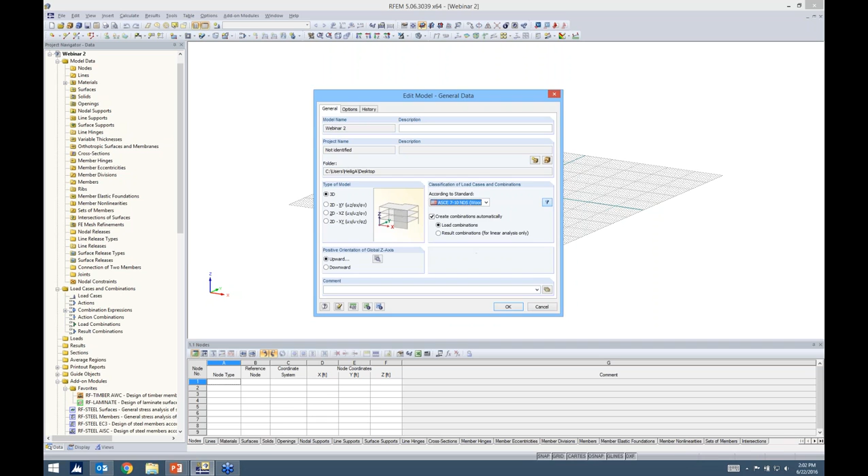When you launch RFEM, this is the dialog box you'll receive. You simply need to give your model a name and define the type of model, 3D, with the orientation of the z-axis upward. For our load combinations, we have ASCE 7 for 2010, the NDS wood load combinations. I check the checkbox to create these automatically, then we simply click OK.

Some of you are familiar with RFEM, but for those who aren't, this is essentially the program. We have the tables for data input as well as our results down here at the bottom. We have our project navigator over here on the left, which can also be used for data input.

We have our display tab down here, which basically controls everything in our view window. We have views, which we'll be using today, and once we run our results, we should get another tab that says results. And of course we have all of our toolbars at the top for our modeling purposes as well.

So we want to begin today with our walls, and typically with walls we'd want to model them in this vertical direction. What I find easiest is to use line elements to begin with. Up here we just go ahead and choose new line in the toolbar, and you'll hear me say this quite often - we have a lot of AutoCAD-like features, which I think is one of the more powerful capabilities in RFEM.

Not a lot of time will be spent trying to create very complex geometries because we have all these capabilities within the program itself, such as splines, polylines, arcs. So you can see for line options, we don't have the typical straight line, but we can choose any one of these. For our application, we'll just go ahead with a single straight line.

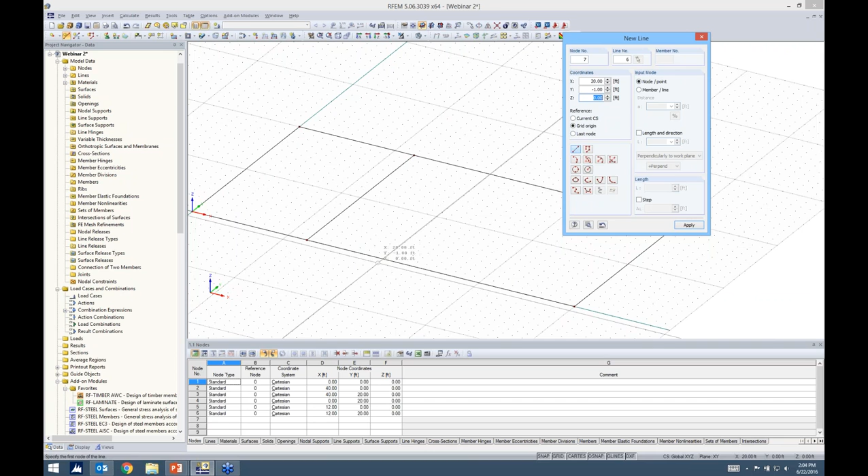Now all I'm doing is using my drawing grid to draw a 40 by 20 outline of my building here. You'll notice I just snapped to the different points, and I'm going to add an intermediate wall, maybe right here at 12, and one more at 20. So we have nothing more than just these 1D line elements here.

What I can do is select them, right click, and under line I can go ahead and extrude the line into the surface. Something to note here, these are going to be cross-laminated timber panels. So cross-laminated timber is not available in RFEM.

In order to define all of those different layers and properties, we have to use our RF-LAMINATE module, which we'll be spending some time in a little bit later today. So it's worth noting that the material here for our panels doesn't matter. We can just go ahead and choose something very general, such as concrete or steel, because all of this is going to be overwritten later by the add-on module RF-LAMINATE. So for now, concrete is fine.

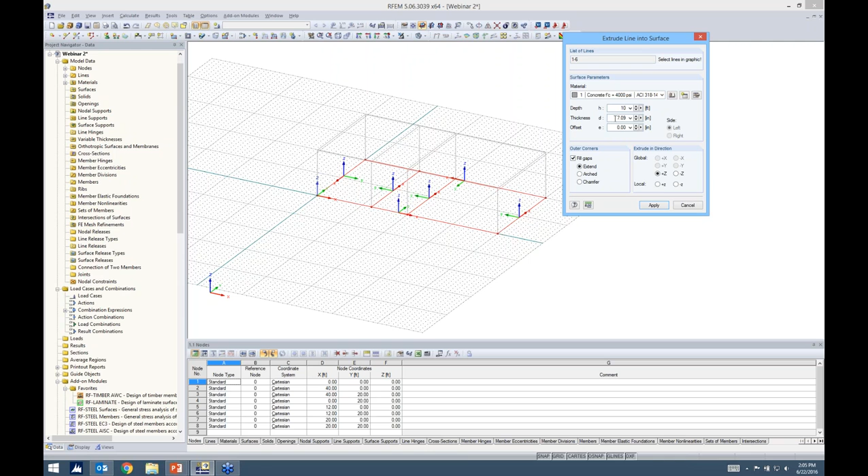I want a height of 10 feet. The thickness doesn't matter either, that will be overwritten as well. So I hit apply, and now we can see that our walls are quickly generated.

Maybe we want to add some openings in these walls, and for this I'm going to go ahead and change my work plane. You'll notice that work plane is just on this front wall of the structure. Work planes are important because when we continue modeling, the work plane confines exactly where you're drawing your elements, so I don't have to worry about drawing clear out in space or accidentally drawing on the back wall. I'll be drawing where this work plane is set.

As far as openings, our other toolbar up here has all the different opening options. We have the typical rectangular opening, but also many other options. This can be super powerful when you're doing finite element modeling, or maybe you have a structure with odd geometry for different openings in a slab or wall. You can see ellipses, polygons, anything you can think of.

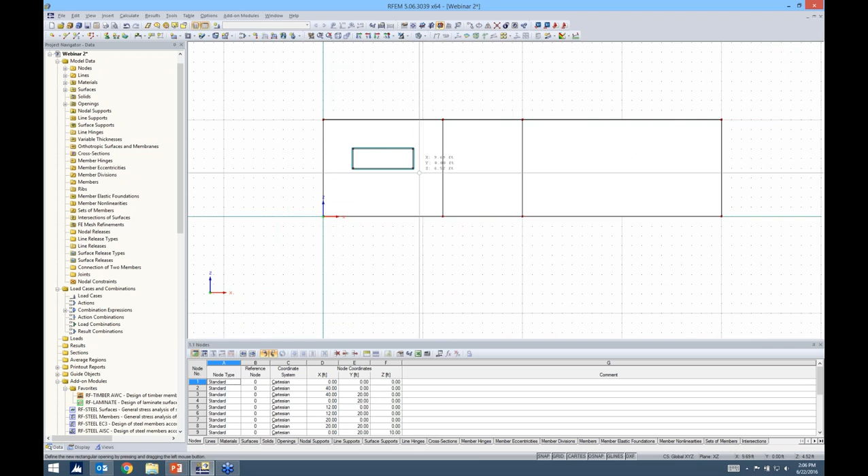For us, we'll stick with a rectangular opening, and I'm just going to draw some windows here, nothing too complex. Maybe we want a door opening here, and lastly a window over here.

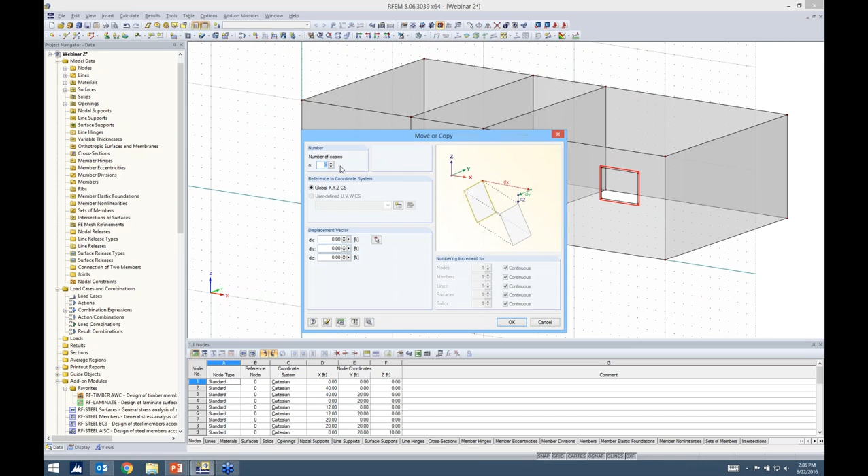Now, as far as the windows for the back wall, I can hold down my control key to select these openings. I'll use my move tool and create one copy, moving it back 20 feet in the Y direction. You'll notice I'm going through modeling maybe a little quick. We have plenty of other webinars with more basic modeling, but I really want to get to the CLT and timber design, so that's why it may seem quick in terms of all the modeling behavior.

Now that we have this defined, I'll change my line grid for my floors. I simply change the work plane again, and you'll see how quickly I can define my different origins, and now I'm at the top of the structure.

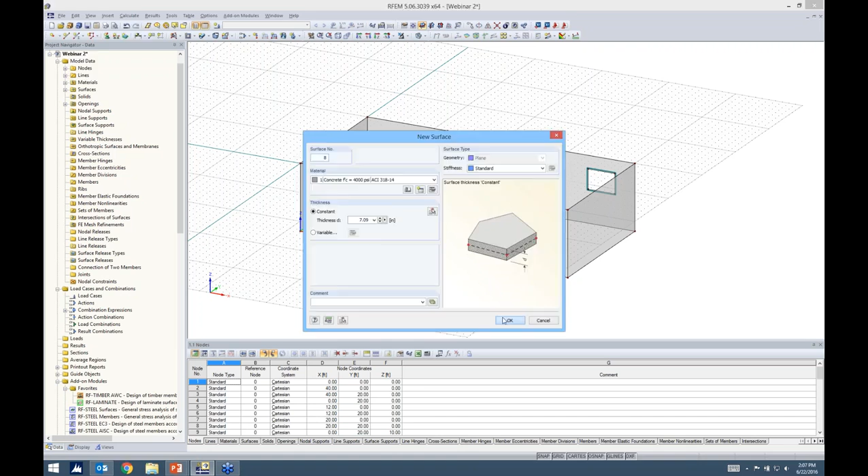We have this other button up here, and this lets me select all of the model. Instead of a single continuous line that previously existed up here, these are now broken up where the wall panels intersect. Now I can create a surface by selecting my boundary lines. Again, the material doesn't matter and the thickness doesn't matter—this is CLT that we'll override at a later point. So all I need to do for my floor elements is select my boundary lines, and then do so for the second diaphragm. And we have our first floor.

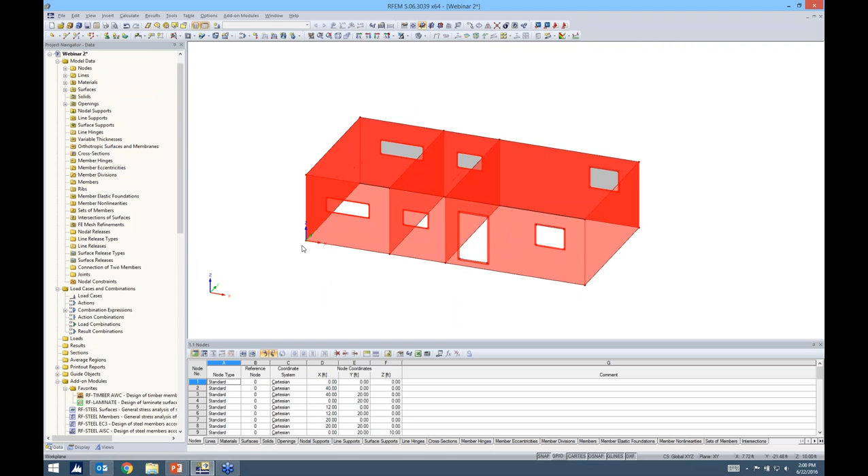Now we want to create our second floor. That's just as simple as selecting our walls—I was careful not to select the floor panels—holding down my control key, and dragging and dropping. Dragging and dropping is a very useful feature in the program to really save time on modeling.

Maybe I don't want this opening up here at the top. I can just select it and delete it.

Now we want to create a pitch in the roof. For this, I'll turn my rendering off to only a wireframe model. This way I can select all of these lines at the roof level, right click, and divide the line by n intermediate nodes, placing one intermediate node at all of these lines.

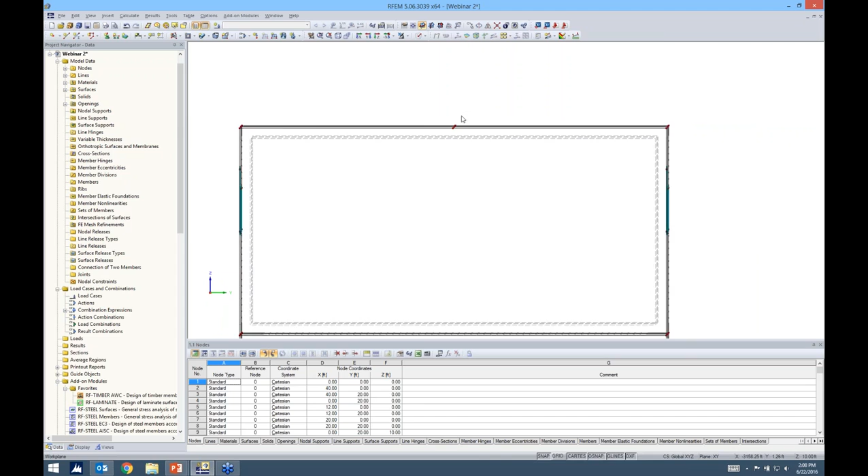Pretty simple. Now I want to highlight only these nodes and use our move and copy tool. This time, instead of creating a copy, I'm going to move these particular nodes in the positive Z direction 3 feet. So now you'll see that we have a pitch in the roof.

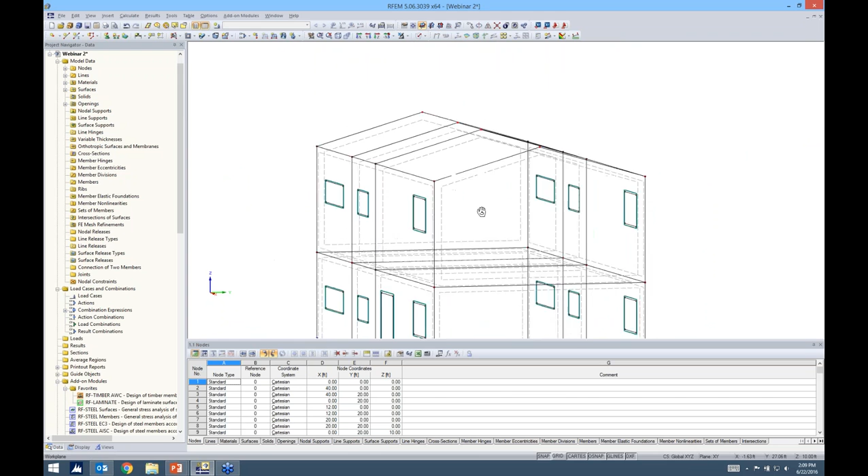Fairly straightforward. So now we want to draw our timber members. We click on New Single Member, and you'll see the member type is considered a beam. There are several other options here, but for this application we just want a typical beam member. We want to create a new cross-section, and up pops our cross-section library. For this, I want to choose standardized timber.

Then this dialog box will pop up for all of the different standardized timber sections. We can further filter according to AWC. We also have CSA in here, depending on which type you're exactly looking for.

You can also go ahead and choose a favorites group. I created this favorites group, USA, and basically I just added in a couple shapes that I'm using for today's webinar. Rather than sifting through all of those different shapes, you can create as many favorite groups as you like and add or delete any of these shapes here.

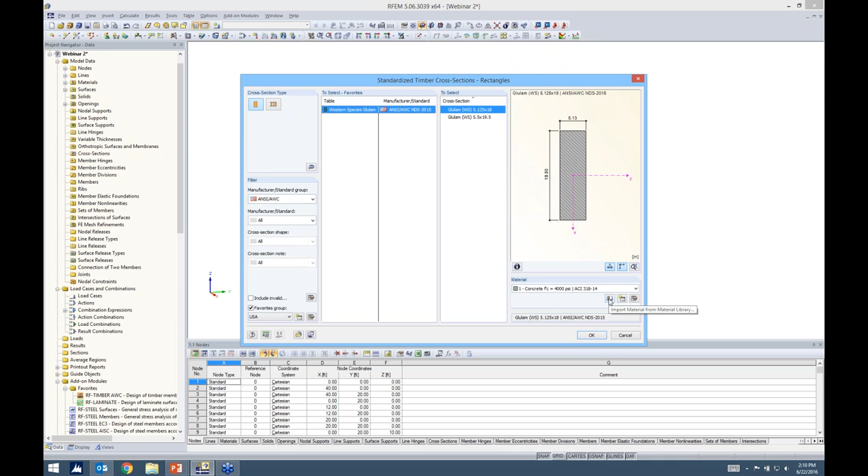Concrete won't suffice for this timber member, so we need to go ahead and define our timber material. For this, I go into my material catalog. Of course, we want the timber filter initially, and then you'll notice that we have all of these further filters.

For our application today, we want to be in North America because North America contains the AWC materials and the CSA materials. Even for AWC, it's quite an extensive list. You do have the option to search here, but again, I added it to my favorites group.

So for this particular member, I'll use a 24F-1.7E for my material. All of the material properties are shown right here, so very easy to access. Now it looks like we have something more like a timber material. I can click on this info about cross-section and get all my cross-sectional properties just at the click of a button.

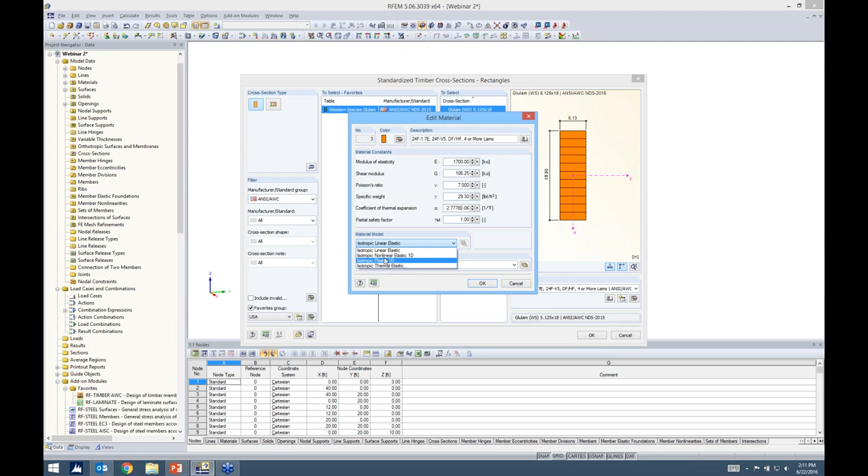Now, one thing to note here: if I go ahead and click on edit material again and look at my particular material model, this list isn't really as extensive, because I only have a 1D element chosen right here. But I'm going to jump back to the PowerPoint.

All material models are listed here available in RFEM. Technically, timber is considered viscoelastic, meaning that the strain rate is dependent on time. But realistically, we can't model viscoelastic in software, it's just very complex, so we will just go ahead and consider it elastic.

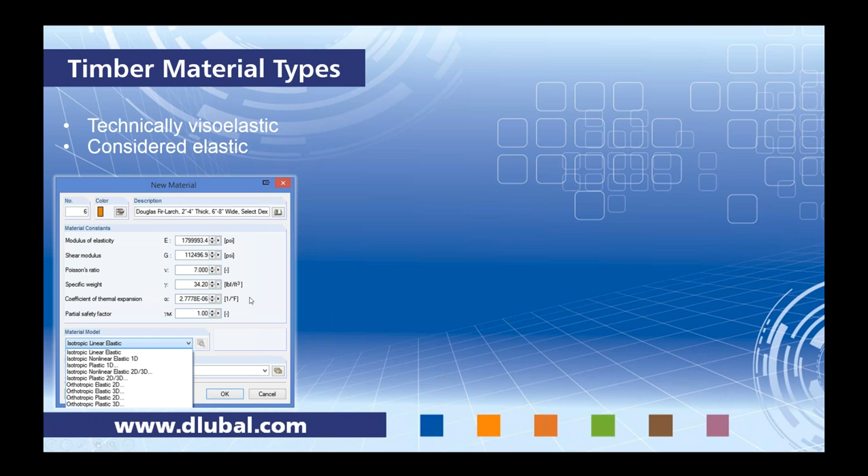This is the basic behavior of modeling timber. However, I want to differentiate the different material models for our different elements. So for 1D member types, such as we're modeling right now, we'll use isotropic linear elastic. For 2D surface elements, we're using orthotropic elastic 2D.

Most of us know what orthotropic is — it's just where our material properties are different in the X versus the Y direction for each surface element. And lastly, we have the solid model, with that same concept, except now we have 3 directions for a solid.

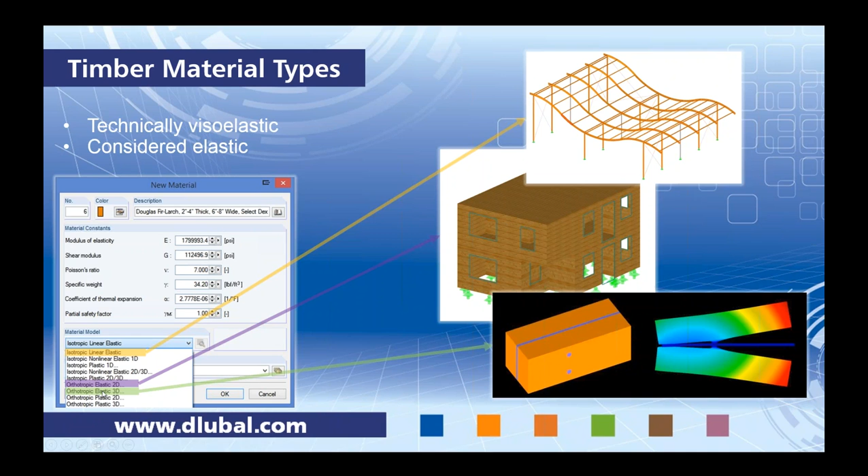Okay, back in RFEM, if I go ahead and click OK, and you've used RFEM before to model timber, you'll notice this error message that pops up every time. This error message is saying you must have incorrectly defined your material.

Poisson's ratio is greater than 0.5. The calculation is possible, but only E and G are applied. Is this okay? I really want to explain what's going on here, because some of us may just click yes and not really know the logic behind why this program's throwing up the error.

So timber is actually anisotropic — the properties are changing with the direction along the object. This is pretty apparent for timber. However, in the program, for 1D members, we only have the option for isotropic, and isotropic materials use this equation to calculate the Poisson's ratio.

It's modulus of elasticity over 2 times the shear modulus, minus 1. So all the program knows is to take E and G, relate it to this equation, and go ahead and calculate Poisson's ratio. Well, 7.0 is extremely high, so that's why the program's flagging it.

And it tells us only E and G will be applied. Is this okay? And the answer is yes, this is fine. The reason why is because if we look at the stiffness matrix for a 1D member, Poisson's ratio is irrelevant — you won't see Poisson's ratio referred to anywhere within this stiffness matrix. So the fact that only E and G are applied, which obviously is present throughout this matrix, that's fine. Not using Poisson's ratio is not a big deal.

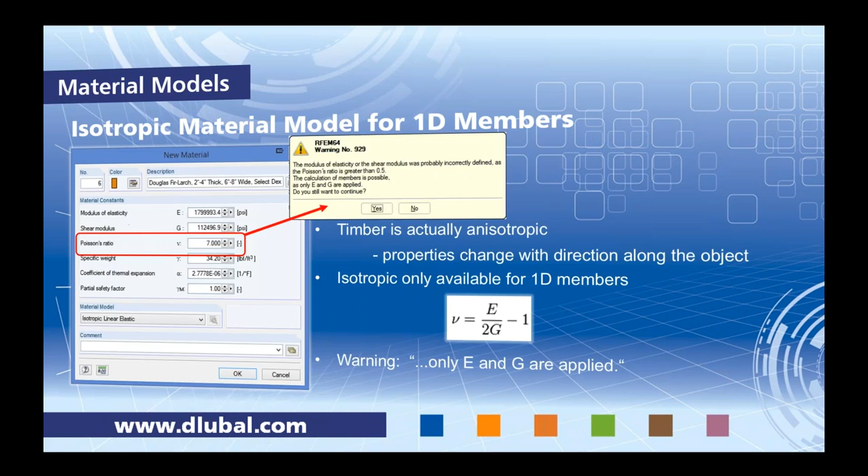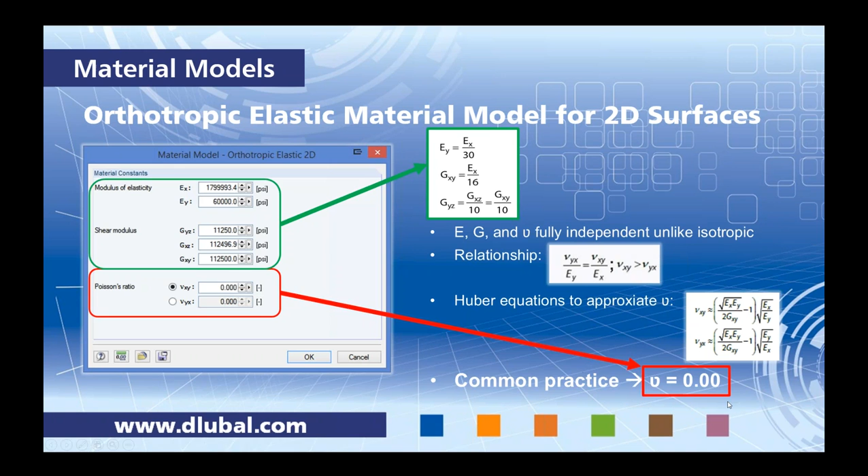Back a couple slides when I showed you this equation E over 2G minus 1, well, this is actually not applicable for orthotropic 2D surfaces. We do have a relationship with Poisson's ratio and the modulus of elasticity, and there are equations to approximate Poisson's ratio, but again, maybe timber cut down on the East Coast and the exact same species on the West Coast will have a different Poisson's ratio. So there's really no way to get that exact number. So therefore, it's common practice just to use Poisson's ratio equal to 0. The program is set up to default to 0, so that's why we use 0.

Okay, so jumping back into RFEM, here's this error. We can go ahead and click yes. So that's kind of where that's coming from, and then I can click OK again.

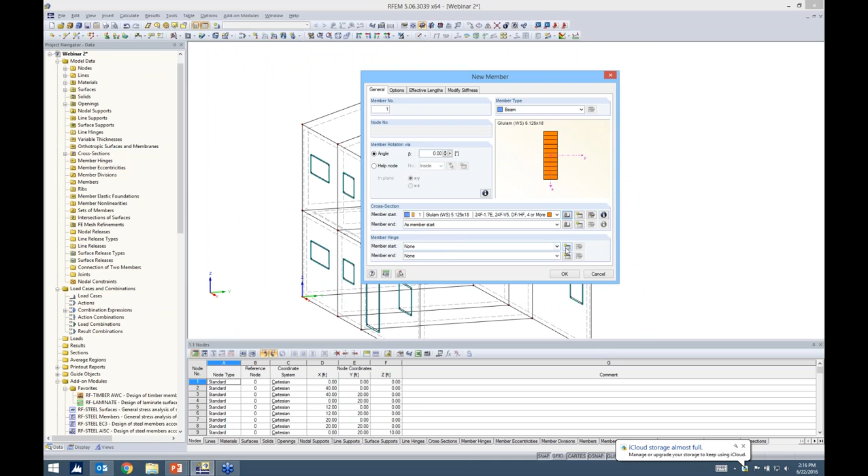Something to also note, we want to go ahead and apply some member hinges to this end. I want to go ahead and create a new member hinge, and the default here is to go ahead and create a pinned release to go ahead and release rotation in the local Y and Z axes. There's a nice picture here if you don't understand exactly how the local axes are laid out. Also, you have the ability to really get into nonlinearities if you choose, such as partial activity. You can define your own diagram, plastic hinges, but you'll notice everything is pretty well hidden if you just want to keep it as a typical pinned or fixed release. So these nonlinearities are possible, but yet it's not overwhelming that you have to sift through all this information just to get your typical release here.

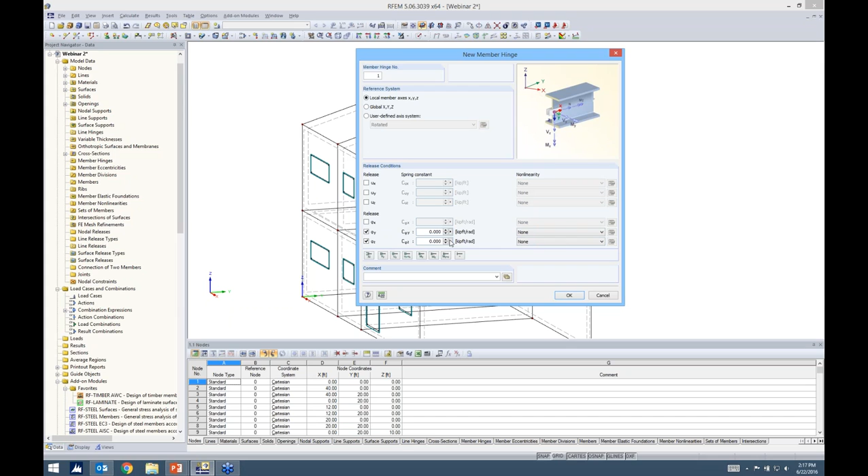So for the member start and member end, I'll use a pinned release. And here I'm just going to go ahead and model this member between each of the walls. And the reason why I'm doing it between each of the walls, I want the pin connection at each wall. I can go ahead and choose the rendered view again, and we can see how that timber member is applied to the roof.

Now, the next thing that we want to do is go ahead and draw in our rafters, and we'll go ahead and create a new member again with a new cross section, this time a parametric timber, and all I need to do is type in 4x8. Now, I don't want this same material. I'll go ahead in my material library. Under my favorites group, I already have Douglas fir larch put in there. I click OK. I click OK again.

Now to address the member hinges. I think where the first rafter joins this larger ridge member, I want a typical pinned release. That's fine. However, for the member end, where we're framing into this CLT wall, I'm going to define a scissor release. And what exactly is a scissor release? Well, scissor release is where we have 4 members framing in together here at this single node. However, the continuous members, such as 1 and 2, will go ahead and transfer moment between each other. Same with 3 and 4, but we don't want to transfer moment to the perpendicular member. We only want to transfer axial and shear forces.

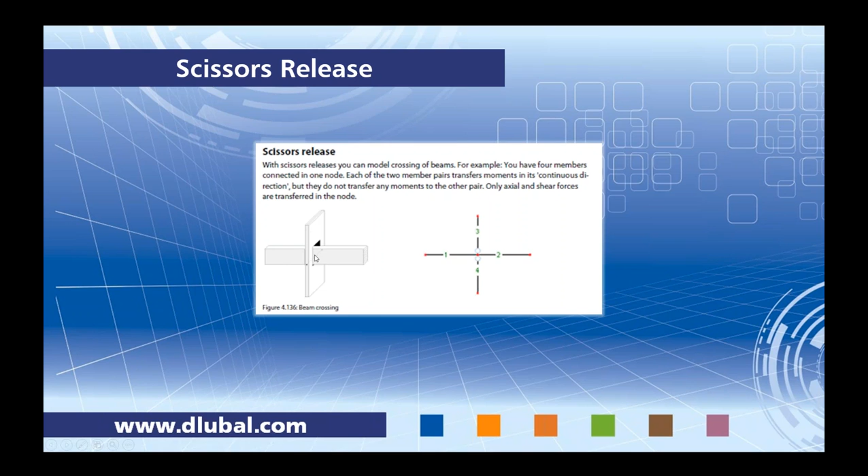So I think that this is best illustrated, and by the way, this was just taken from our manual. This is best illustrated with a beam or our rafter passing through the wall. You can see that moments will certainly be transferred for the items considered individually, but considered together, we don't want to transfer a moment to each other.

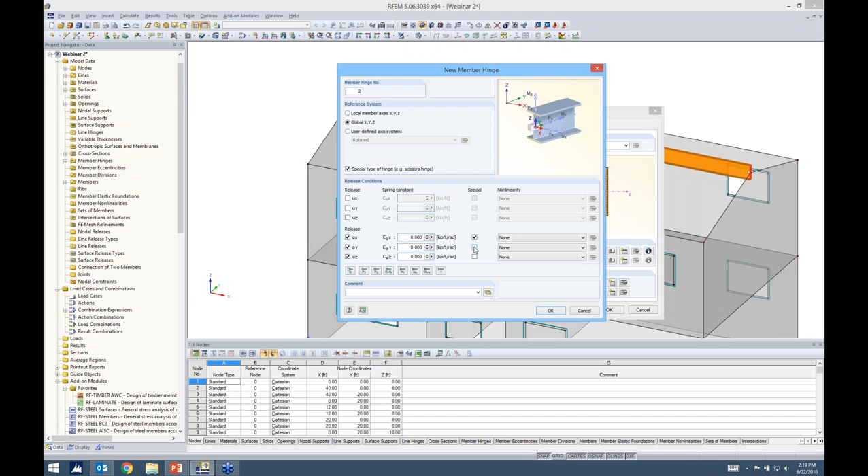So we will go ahead and go back into the program, and under the member hinge, we'll create a new member hinge. And here, instead of the local X, Y, and Z axes, I'm going to create a global X, Y, and Z. Then you'll notice that this option pops up here for a special type of hinge. And with this, I can now go ahead and check this checkbox for special and release all rotations.

If I click OK, you'll notice the program denotes this as a little different from a typical release by putting an S on it for special. So I click OK, and then I just need to go ahead and draw in my first rafter, using drag and drop by holding down my control key.

I want to extend the member and adjust my member releases for the second one. I also want a scissor release at this location. My member start is available in this drop-down, but member end doesn't matter because I'm going to divide this member by a certain distance.

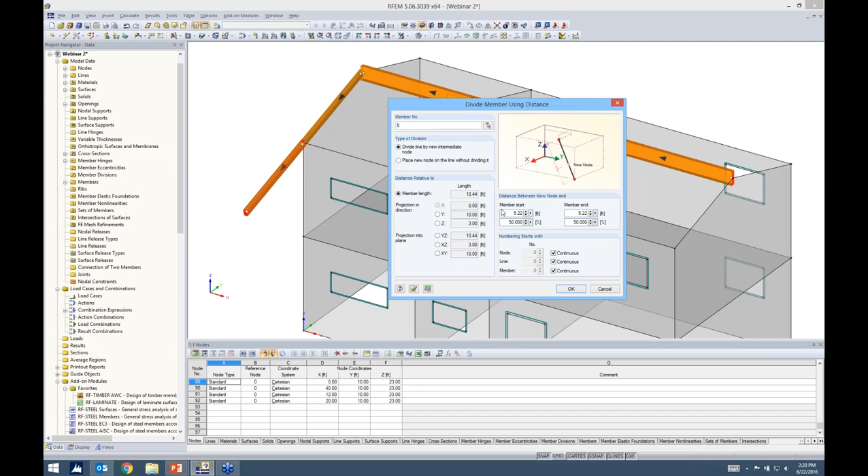In this divide dialog box, I don't have to guess what's the member start and end - the program shows a little black arrow for all members indicating the start and end, or the I and J ends. So the member start, I'm going to divide it 5.22 feet from there. I click OK, and now I have 2 separate members.

I'm just going to delete these. As far as the scissor hinge, I need to move it over slightly because I'm at this intersection of 2 walls, and the program will give an error due to this odd connection. So I'll select both by holding control and use my move tool, 0.5 feet in the X direction. Oh sorry, let me undo that - I also had the Z direction defined as 3, so we'll change that back to 0.

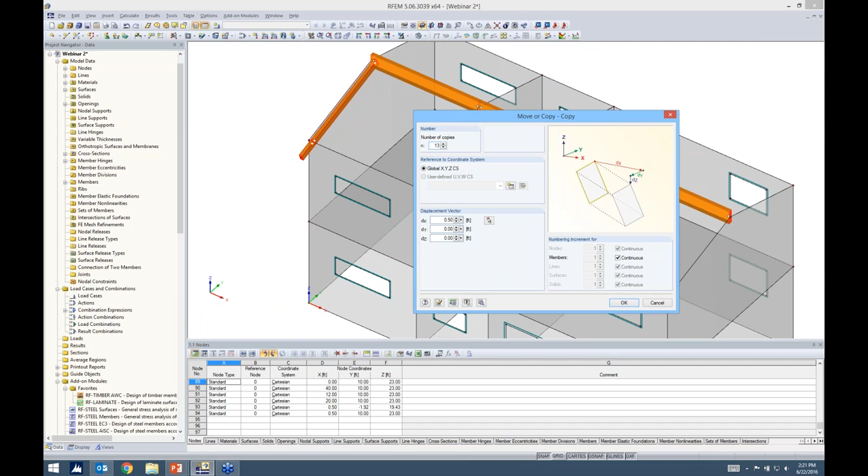As far as the rest of the members, it's easy enough using our Move and Copy tool. I'm going to create 13 copies at 0.5 feet on center. I click OK. All the hinges, special types, are there, and my spacing is correct, so everything looks good.

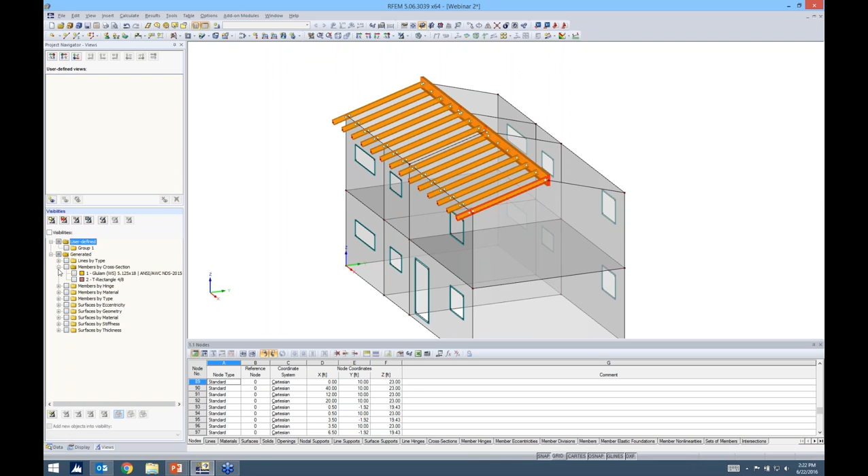Now I need to do the exact same thing for the other side. I could go through that whole process again, but I want to utilize the tools in RFEM. Under this Views tab, you'll see default options for selecting different objects in the view window - for example, there's an option for members by cross-section.

So all my different members by cross-section would be listed here. I just want to select my 4x8s. Notice I can't select anything else in the model, which is exactly what I wanted. Now I highlight all of these and use the mirror tool, just like in AutoCAD. I create a copy, choose to mirror through the XZ plane, pick one of these top points, click OK, and now I have my roof.

So again, a lot of features to quickly model in here.

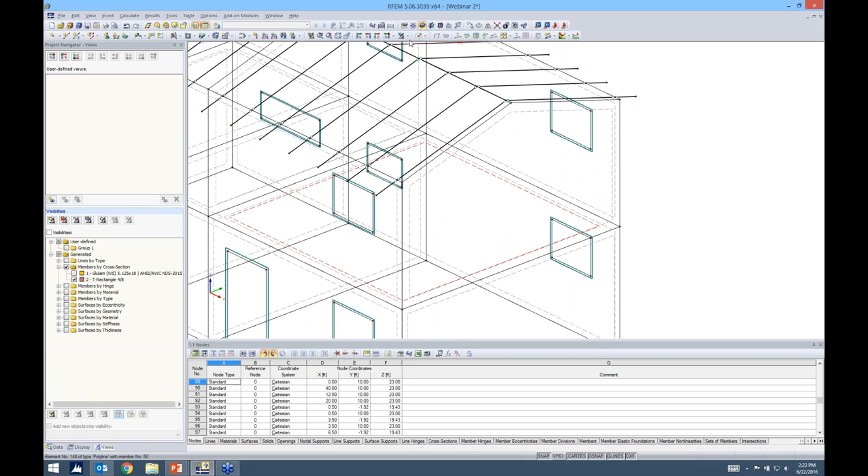Okay, lastly for this, one more thing - let me turn this into wire view. If I zoom in and select this floor panel, then choose visibility by selected objects, I'm only looking at this single floor panel. This floor panel is pretty long, and maybe I want to add a beam along here. That's easy enough, but I want to drop it down so the eccentricity is included for the surface thickness as well as half the beam depth.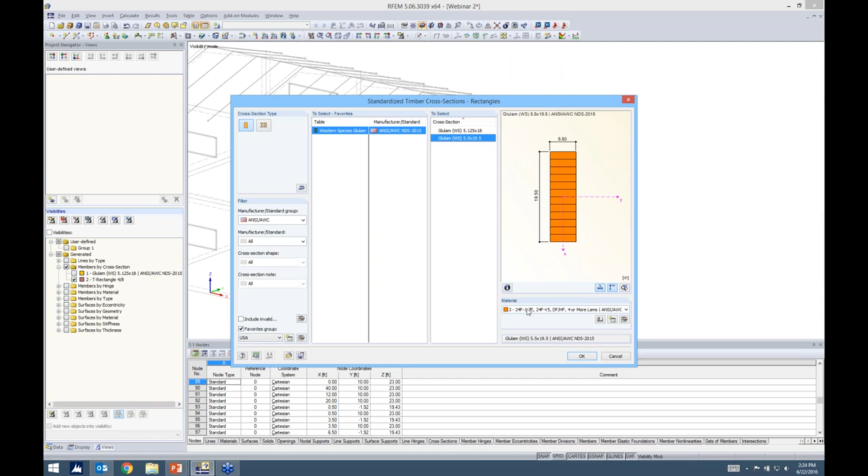With that, I can create a new member just like before, create a new cross-section. I'll go into standardized timber and choose my other glulam that was in my favorites list. Materials are already defined, so it's fine to leave it the same as the other one. As far as my member end releases, I just want a typical pinned release.

Now there's another option here called options. Under this options tab, we have member eccentricity. If I create a new member eccentricity, I can either choose an eccentricity by defining the length, either at the I or J end, or I can do a relative offset.

This is really user-friendly. I want to note, though, that when you're first applying these different eccentricities, it could take a few tries before you get exactly what you want, because the local axis is very important.

Just because I've been in RFEM enough, I know that my local axes are opposite of what is shown here. So realistically, instead of choosing the top of the beam, I would choose the bottom here, because I know my local axes in here will be modeled with the local z-axis up.

Now it's asking what you want to offset it by. I can choose either a member or a surface. So if I choose this surface and then graphically choose the surface I have selected here, again I know my local axes are opposite here, so I actually want to select the top. I went ahead and clicked OK, then I can go ahead and click OK again, and now I can go ahead and model this particular beam.

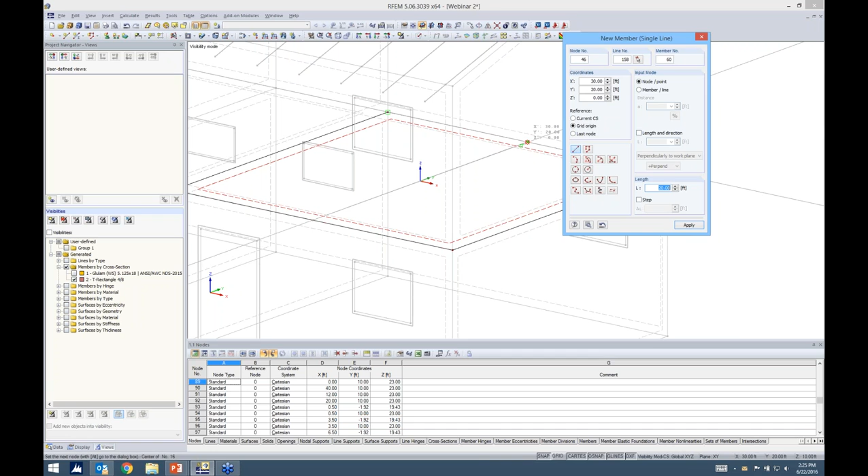You'll notice too that I don't need to model in extra nodes because of the CAD-like capabilities. My centerline snap point pops up, and I can choose the other centerline. You'll also see a perpendicular line, so it's kind of nice in the sense that I don't really need to worry about drawing in an extra node there.

I can go ahead and render it to show exactly how this beam was dropped down. You can see the rigid links that were created, and these rigid links were created based on half the depth of the beam as well as the surface thickness.

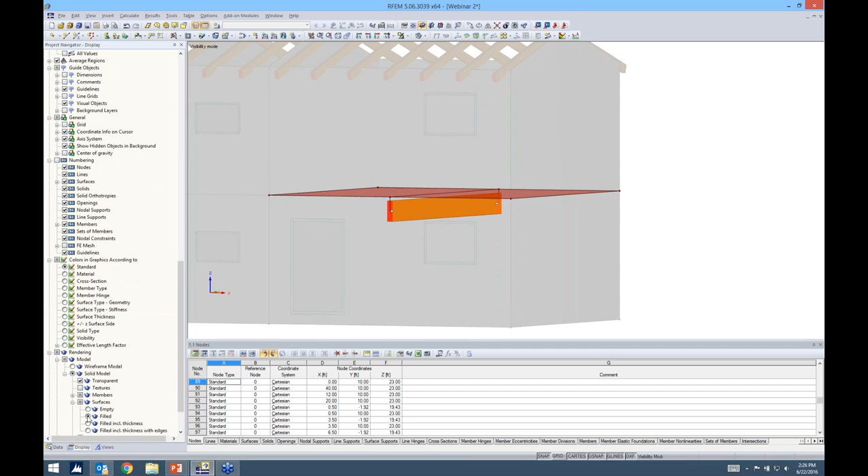I can also go into my display down here in my project navigator, and like I said, this controls everything we're seeing here. I just want to show you guys that you can go ahead and render these surfaces to filled, so that you can really see how this beam is dropped below that particular panel. Okay, I will go ahead and cancel my visibility mode here.

The last thing that we want to do is go ahead and add some line supports here. Line supports can be applied, let's say, to the bottom of these walls. Default, hinged, and rigid — pretty self-explanatory.

If I create a new support, again just like member end releases, you really have the ability to dive into these nonlinearities — friction, partial activity, sliding — all of these are possible with these support reactions. We're not going to get into this today, but just know that it is an option.

So for us, we'll just keep it as a typical hinged support, and we'll apply it to all of the bottom of the structure. Okay, so our modeling is essentially complete for the structure.

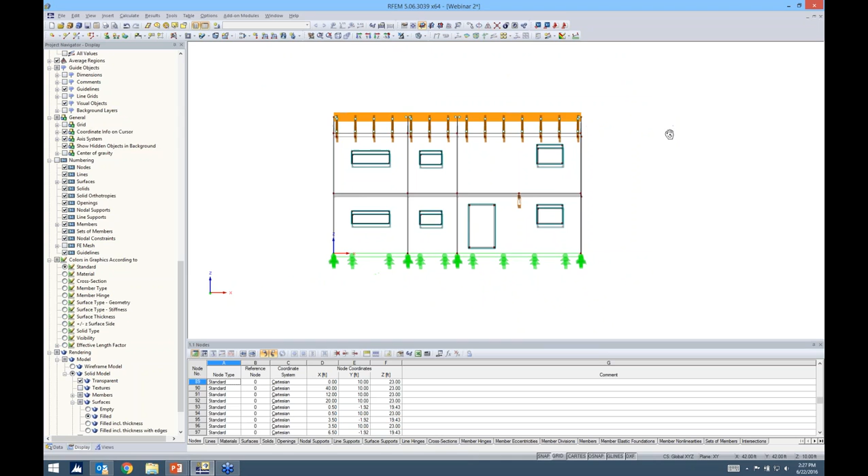Now I want to go ahead and quickly add in some loads. For this, I'm going to go ahead and create some new load cases, and that's just opening up our load cases and combinations dialog box.

So the first load case will be dead, and we want to go ahead and keep the action category as dead. You'll notice self-weight is activated for it.

I create another one, I'll call this one live, and we'll assign it to live load. We need to pay careful attention to the action category, because this is how the program assigns these load cases to the ASCE load combinations. If you incorrectly define an action category, you're going to get the wrong load factor. So keep in mind that these are important when you are assigning your load cases.

We'll go ahead and assign wind here, and we'll assign it to wind. And lastly, we will assign snow to snow.

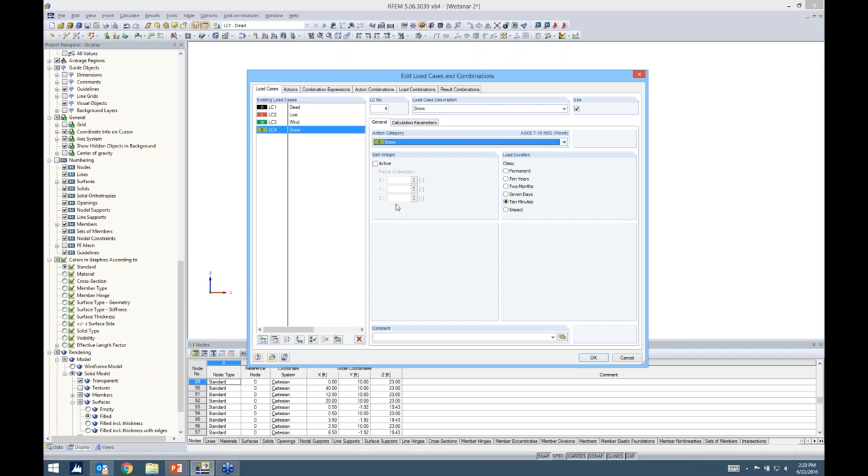Okay, so I can click OK out of here, and you'll notice that when I'm looking at my drop-down box now, which previously was empty, I now have all of my load cases. The program went ahead and automatically created all of my load combinations according to ASD and LRFD.

For now, when you're applying loads, you want to make sure that this is set on the correct load case that you want the loads applied to. So I think what's easiest here is to go ahead and highlight our floors and make this visibility based on the selected objects. Then I can go ahead and just quickly add surface loads to my first floor.

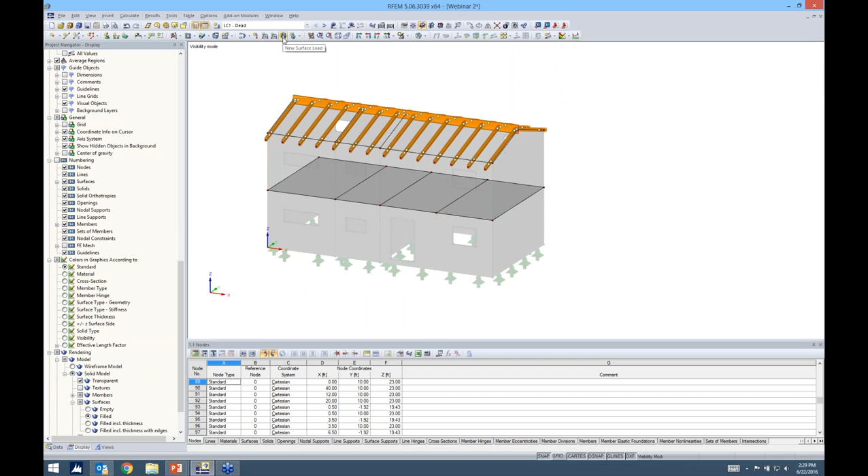I'll go to new surface load, and you'll notice here that you have options to really get into depth for your surface loads. For us, we're just going to keep it as a typical force uniform. As I scroll through these different load directions, this little picture updates, so you can see exactly how you're applying it in your model.

For us, we will just go ahead and stick with the ZL direction in the negative direction, with our magnitude at -0.1. I click OK, and it's as easy as clicking on the surfaces.

Now, for my members up at the top, I want to use our tools to generate loads from area loads on members via plane. Again, we can scroll through these different options. I'm going to stick with the typical ZL. What this will do is apply an area load, and it will actually distribute the line loads based on tributary area to all the different members. Now my magnitude will be -0.05.

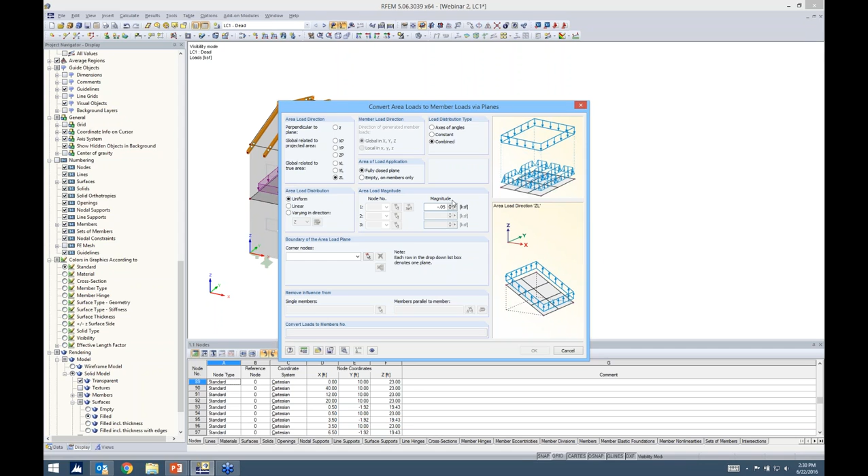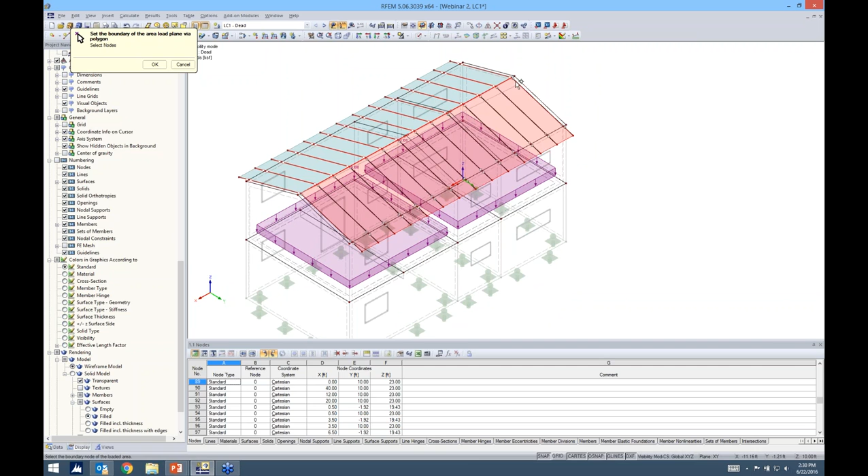The program's asking me, okay, where should I apply it? I need to give it some area loads. I can change this back to my wireframe, and I'm going to select first one side of the structure, and then go ahead and select the other side as well. This will be taken into consideration when the program applies this dead load to the roof members.

I can also, which I think is a nice feature, remove the influence from single members, or remove the influence from all members parallel to a certain member. So if I choose this option, maybe I don't want the dead load applied to my ridge member. I click OK, I click OK.

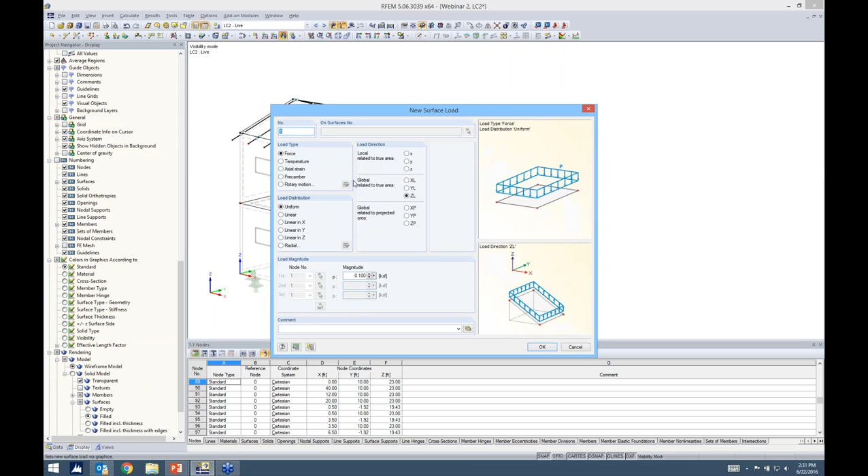Now, quickly going through live load, same thing. We'll just apply a surface load in the ZL direction, but our magnitude will be a little bit less, and we can just go ahead and apply it to these two surfaces here.

Now, wind is obviously a little bit different. We could technically do some calculations according to ASCE, and just to let you guys know, we do have the ASCE load combination generator for wind loads in our internal version now, so I'm hoping that that will be released fairly soon.

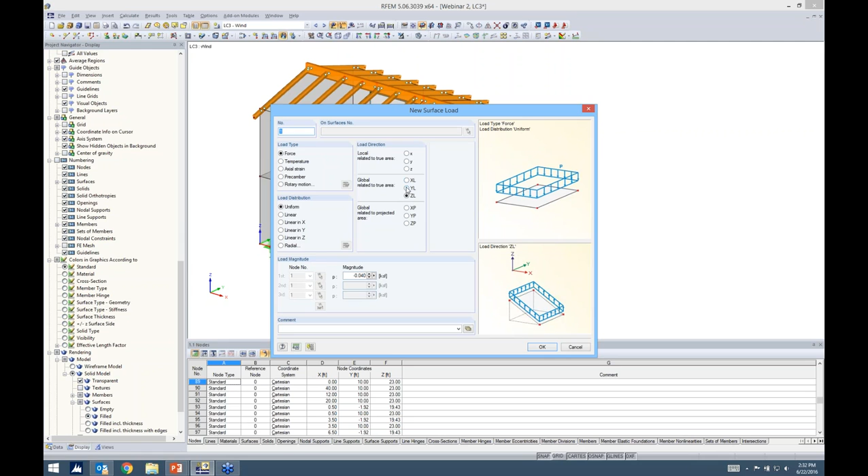For today's sake of time, I'm just going to apply a lateral surface load. I'm going to apply it in the Y direction with a magnitude of 0.04, and all I need to do is click on my surfaces. You'll notice my openings were taken into account.

Maybe later I decide, okay, I don't want this opening. Well, if I delete it, the load is automatically filled in that particular opening. So everything is very automated in the program, which is nice for a lot of the changes.

Now, lastly, we have snow load, and for this, I do want to utilize our load generator from snow loads for a duopitch roof for ASCE.

For this application, I think this is nice because if you're used to snow loads according to ASCE, all of these factors will look very familiar. If by chance you're not sure on a factor, if you click this info button, these are all the tables taken directly from the code. So it's nice that you don't necessarily have to flip to the code in order to get some of these factors. The same with the ground snow load.

We actually incorporated this map here, and we can double click on, let's say, our structures in South Dakota, and it will automatically come up with our ground snow load.

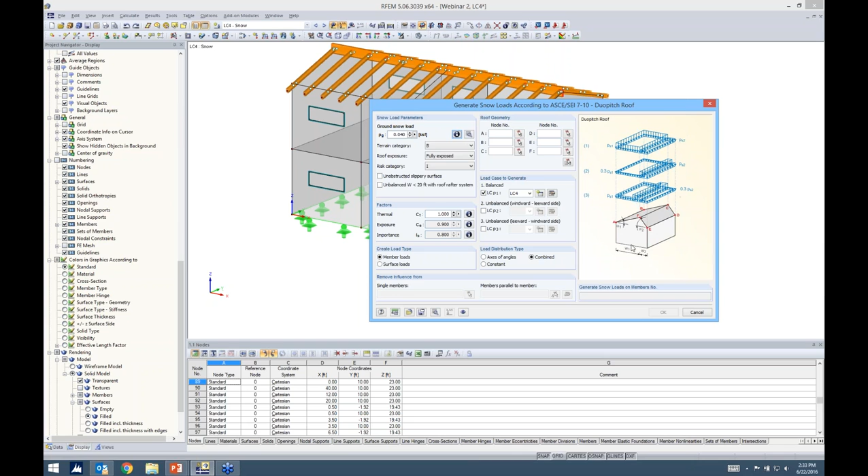The roof geometry needs to be defined, and one important thing to note here: you can't just click all over to create your roof geometry. You really do need to follow these same guidelines as what this little window is showing you. So with that, I can easily go ahead and choose my roof geometry based on my rafters here.

And the program jumps back into this. Now I'm just going to do a balanced load case, and you'll notice it automatically assigned it to our snow load.

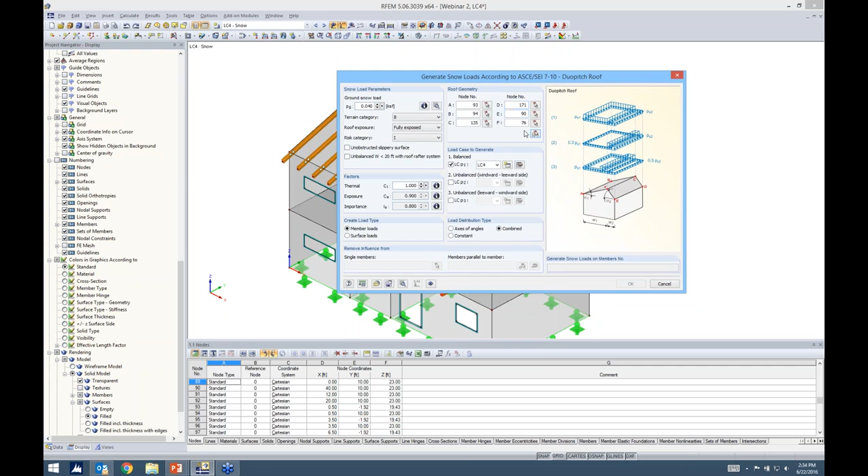Sorry, for some reason I must have not selected my roof area load correctly. Let's try that over again. Okay, well regardless, we can go ahead and apply the snow load here. If I go ahead and generate my loads again, I think there might have been an issue with the load combination generator in terms of my roof geometry. So for this, I can go ahead and select my options again, but this time I'm going to turn it into wireframe to see if that works a little better. Maybe I was not selecting a proper node.

Okay, much better. Now that's a good point to make, that if you don't correctly define this roof geometry, this OK button will be grayed out. The program's smart enough to know that something's slightly wrong, so you do need to address something in your data. For me, I must have clicked on a wrong node someplace.

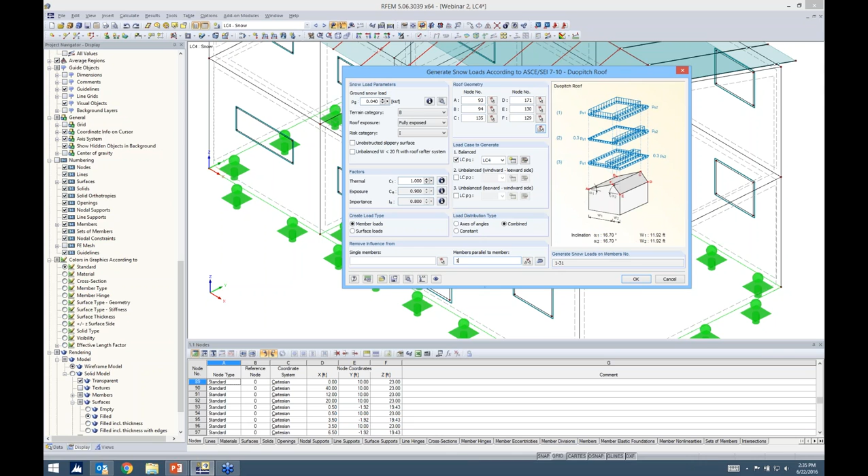We can exclude the members parallel to member 4 again, and I click OK. Up pops my calculations for the ASCE, and then you can see here that, again, we can right-click and display separately, and we get a nice layout of how the load is being applied to all those different members. Okay, so now that we have all that, we can actually jump into the laminate module.

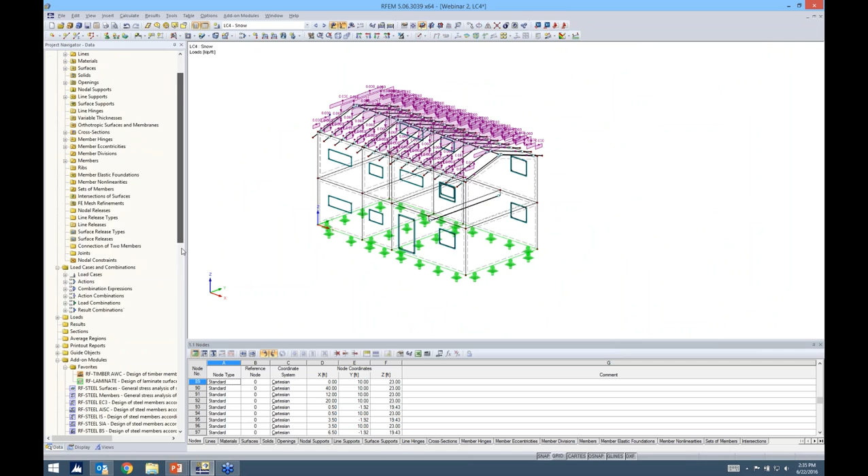So RF laminate here. I want to go back to the PowerPoint to describe what we're doing in RF laminate. In this module, we're actually going to define the different layers of the CLT panel. Each layer is going to have its own properties, such as our modulus of elasticity and shear modulus. And we'll go ahead and create a stiffness matrix for each layer.

Also in the program, it will go ahead and take each layer and then create an overall stiffness matrix. For example, this is an example from the D11 entry in the stiffness matrix based on all of the different layers. Then the program will export these correct stiffnesses back into RFEM.

So we now no longer have those concrete panels and floor panels and such, but rather now we have the laminate panels with the correct stiffnesses. The program will go ahead and run all of our load combinations based on ASD or LRFD and get all of the internal forces. Then it takes those internal forces back into RF laminate.

It will distribute all of the stresses to each layer based on these differential equations here. And maybe more graphically, you can see the stress distribution throughout the depth of a cross-laminated timber panel. It would look something similar to this. Then for each stress, we're actually going to go ahead and separate it into tension, compression, and bending components.

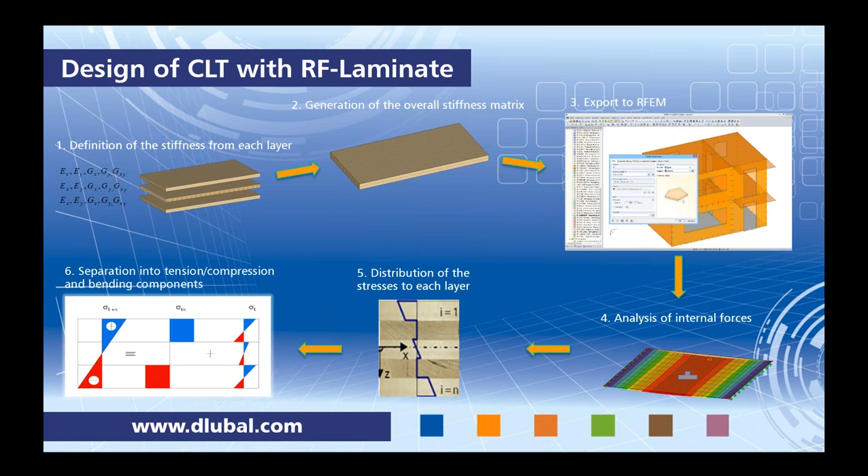Then we take those stresses and compare them to what the code's giving us for our limit stresses, and then we're going to get a code check. So essentially, that's how RF laminate is working within the program.

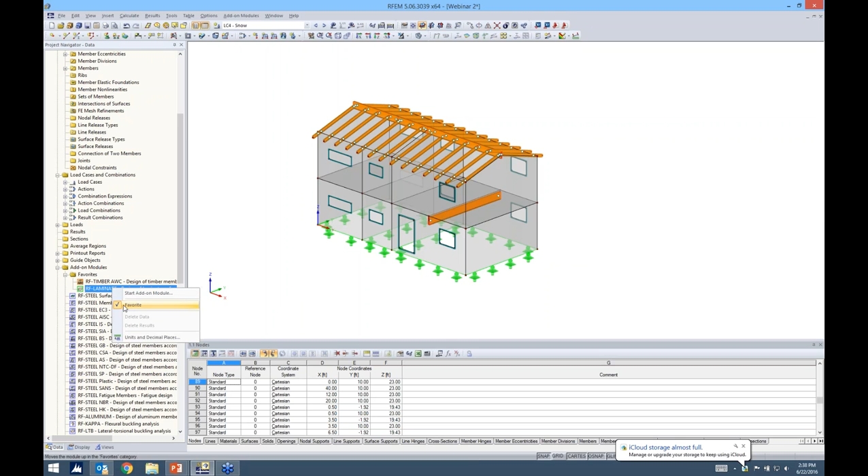So you can see here that I'll go ahead and go back to my rendered view, and I have a multitude of add-on modules, but I added the ones I'm in most often. You can just right-click and check favorite to move it up to the top, which is nice.

So I'm launching RF laminate. When I say add-on module, this is the add-on module. It looks like another dialog box. So I don't have to remodel anything. I don't need to worry about linking data together. Everything is all within RFEM.

And the other thing for these add-on modules, you just want to work from top to bottom with the input data, which is given here on the left. So just work down this list. The first thing it's asking us is what surfaces do we want to design? I can check this checkbox all, so all surfaces are now selected in there.

Now for standard, we want to choose the NDS-2015. And you'll notice we have both ASD and LRFD. I'll go with ASD. Therefore, I want to select my ASD load combinations from ASCE. So here I can just select the ASD load combinations, and these are what I'm going to use for my design. Serviceability is if you want to go ahead and do a serviceability check in the program.

And under the standard, you see you can set here your limiting deflections. Today, we're not going to do this, but just to note that that is there.

Material characteristics. So the first thing we want to do is define the first composition. I'm going to title this one walls. You can go into your material library for timber and add all the different particular material types you'd like, giving it a thickness and a direction.

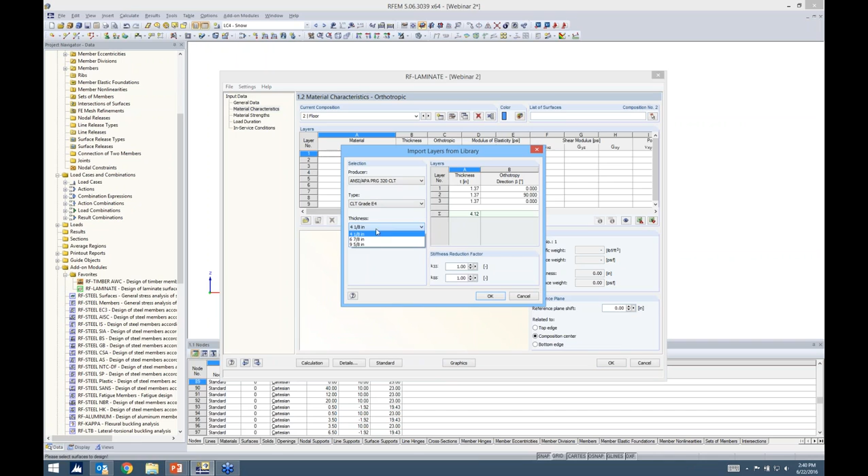It's going to ask which surfaces I want to define, so all I need to do is select my walls. I click OK, and that's automatically done. Now I'm going to create a new composition called floor. Same exact thing - we'll get this from our material library, but I'm just going to increase the thickness to 6 7/8.

The other thing to note here, if we go back to walls and click this button, Edit Composition Details - do we want to consider shear coupling, and do we want to consider that the cross-laminated timber is without glue at the narrow side? So what exactly does this mean?

Back in PowerPoint, shear coupling is nothing more than whether the layers are glued together. You can see here that when we do consider shear coupling, our stress diagram throughout the depth of the CLT is related. When we're not considering shear coupling, each layer has its own behavior that's not related to any adjacent layer.

Most likely the different layers will be glued together, so for our case we're going to consider shear coupling. Now, consideration of edge bonding - are the boards glued at the narrow side? This is a perfect example of where the boards are not glued at the narrow side, so we'd set our stiffness in the local Y direction equal to 0. We'd also reduce our in-plane shear stiffness by 0.25.

When I go back to RFEM, you can see I'm already considering coupling. If I check this cross-laminated timber without glue box, you'll notice my in-plane shear stiffness will now be reduced by this coefficient, 0.25. That's exactly what I just mentioned in the PowerPoint. We don't have this scenario here, so we'll just leave this alone.

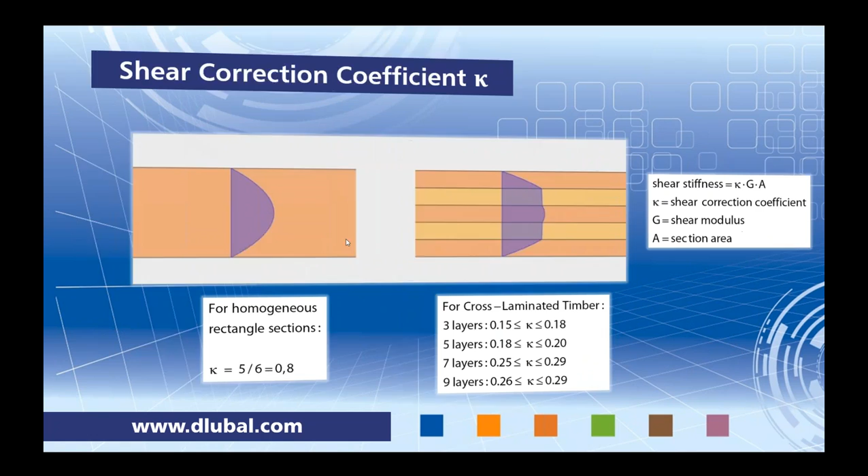Now for shear stiffness elements, this gets a bit more complex. If we take a look at any type of rectangular section, we will always have a shear stiffness reduction. For homogeneous rectangular sections, this is set at 0.8. However, for CLT, we obviously don't have a homogeneous section - we have all these different layers, so we can't make that assumption. For our shear stiffness, we need to determine the shear correction coefficient κ, times G, times A. Now what is this K for cross-laminated timber?

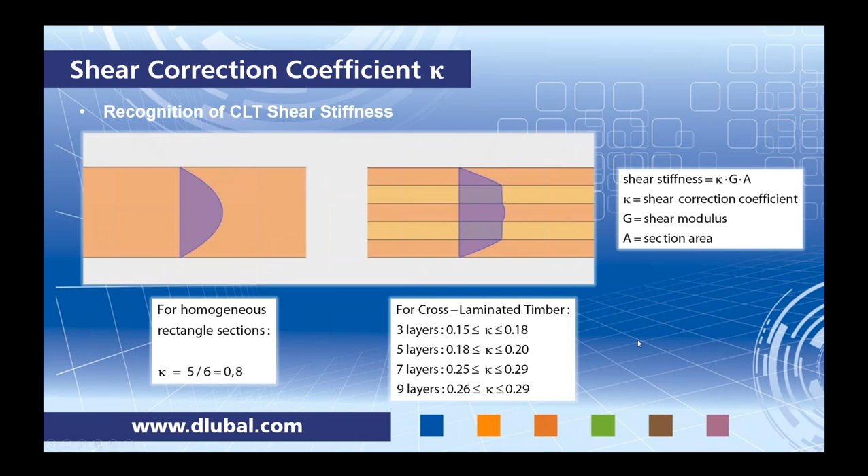There are several suggestions from research to use these ranges for 3, 5, 7, 9 layers. The question is, what if we get to a point where we have 10 layers? Or what if we want an exact coefficient within this range but don't know exactly where we fall? Well, the good news is the program does this automatically.

Shear stiffness coefficient calculations according to general research and regulations - this is also in the CLT Handbook for the USA - gives this equation for the coefficient, and it's pretty complex, as you can see. When you look at RFEM, if we take a look at all of these insanely long calculations, this is what RF-LAMINATE is doing in the program to determine the D44 and D55 entries in our stiffness matrix. It's actually going through all of these calculations to get these values.

If you're an engineer and you have a lot of time on your hands and you're dying to know what this coefficient is in the X and Y directions, you can take these values, D44 and D55, which we give in the program, and back calculate to find out what those shear coefficient reductions actually are. You'll notice D44 utilizes this, and D55 as well.

Going back into the program, if I click on this info button, I can open up my stiffness matrix for this particular composition, and I can see D44 and D55 here. These are the values you would want to use. This is something you probably won't be changing unless you really know what you're doing, because the program is automatically calculating this for you. Just keep that in mind when you're in these details options.

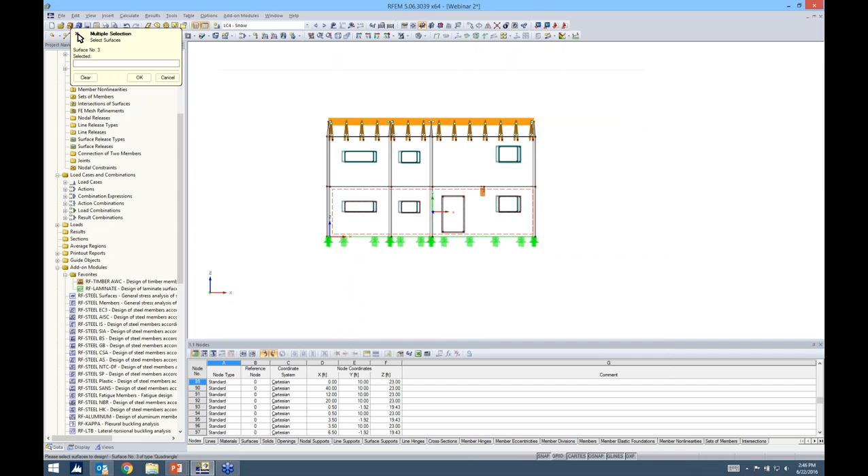I click OK, and now I look at my model, and they're blue. I double click on them - they're not concrete anymore, they're now RF laminate. In order to edit them, you need to go back into the laminate module. I can right click and display my local axes. Notice that all of my local axes are in the horizontal direction. This is not good - we want these strong layers oriented in the vertical direction to take those gravity loads.

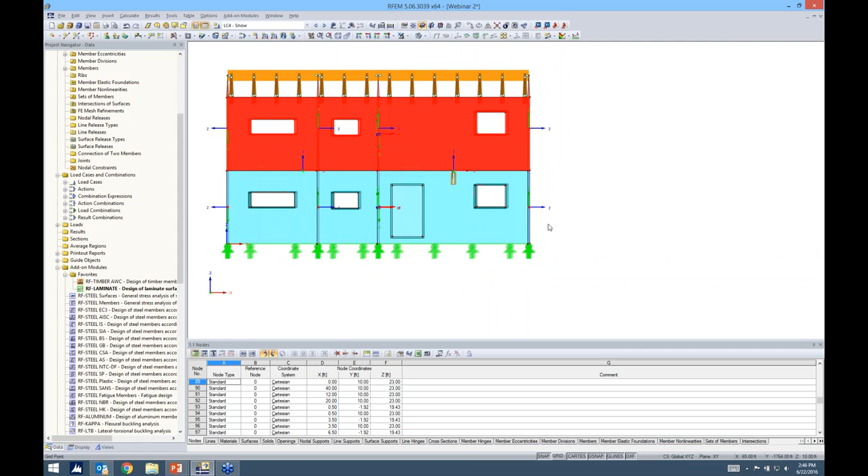I could sit here and change the orientation of all of these surfaces, but better yet, we have a quick feature in the program. If I select all of my wall panels, right click, go to Surface Edit, there's an option called Axes. Under Axes, there's an option called Axis, and I can set all of my local x-axes parallel to a line that I choose in the model. I'll choose this vertical line here and click OK. Now you'll notice all of my local axes are oriented in the vertical direction.

These ones come from the floor panels, so we don't need to worry about that. Again, this is a very important detail - otherwise you risk your results being inaccurate because you haven't oriented the direction of the layers correctly.

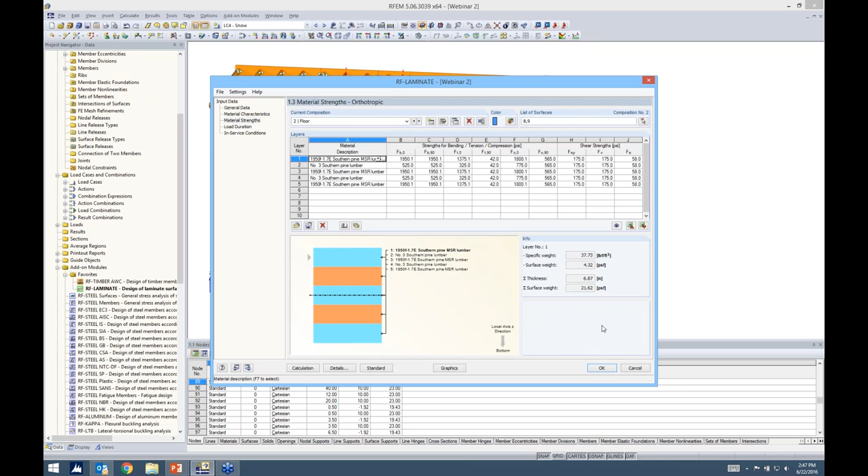Going back into RF laminate, we can continue moving down here. Actually, one more thing I forgot to do - along with the orientation of the axes, you'll notice here that we have our walls framing into each other, and this is a rigid connection now. For cross-laminated timber, we probably won't have a rigid connection, almost guaranteed. So how do we address that? The answer is with line hinges in the program.

Every surface is composed of line elements on the outside. If I go to Insert, Model Data, and Line Hinges, I can assign a line hinge graphically. I need to give a new definition for a line hinge. With the screws and cross-laminated timber panels coming together, I'm probably not going to have any resistance for rotation about that joint, the local x-axis, so I'll leave this as released. As far as translation along the joint, we'll probably have a little bit of slippage there, so maybe I can define a spring stiffness coefficient of 40 kips per foot squared.

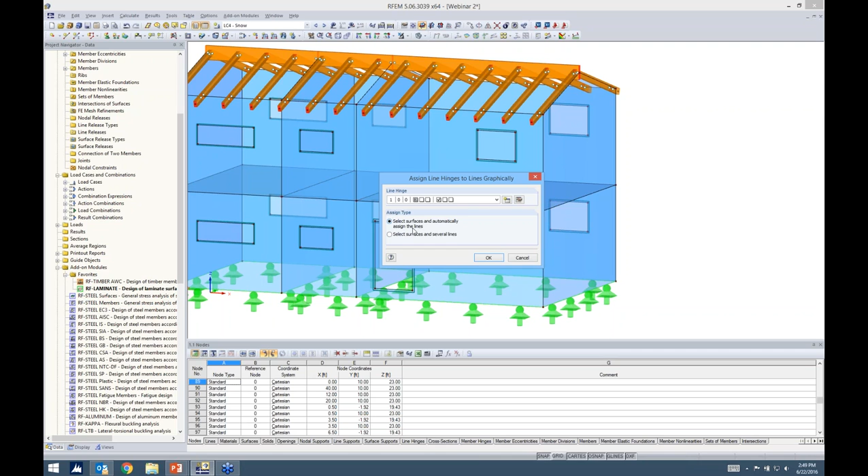I go ahead and click OK. I'm going to use this option that says select surfaces and automatically assign the lines - I think it's quickest. I click OK, and then I can select all of my walls, and they're all listed here. I click OK, and now I have all of my line hinges assigned. I can see these line hinges, double click them, and edit them individually. It's a nice feature to use that tool. However, there's one thing we do need to clean up.

Just like the example where you have two members framing into each other, you cannot define the member ends both as pinned. You'll get an instability. You need to have at least one rigid member, and the other member framing into it can be defined as pinned. But if you define them both, we get issues within the program.

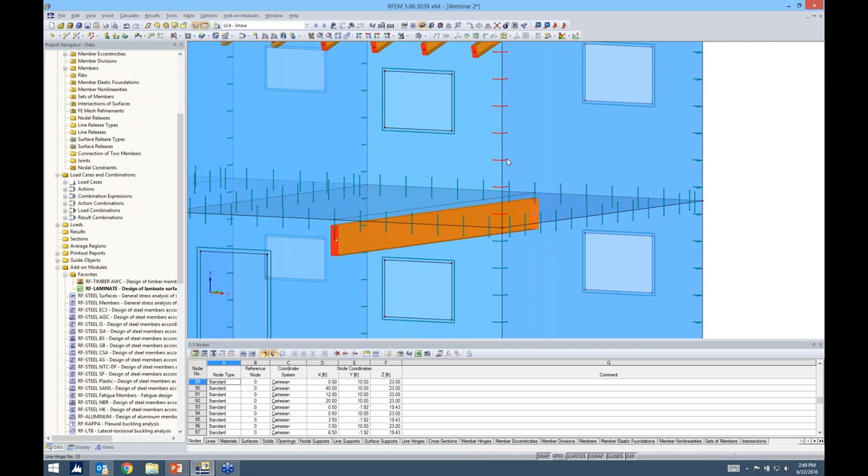Same for wall panels. We don't want to define two wall panels framing together both with a line hinge. We actually want to delete one of those. So I'm just going to hold down my control button, select them graphically, and click delete. Now let me do so on the other side, again holding down control, and click delete.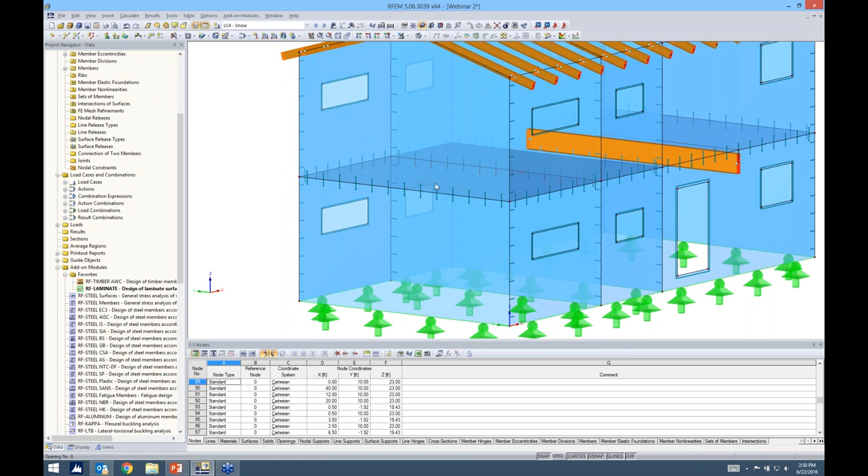Now you might ask yourself, well, I see two line hinges here, but the reason is because my floor panel is also framing in here, which doesn't have a line hinge. Therefore, we're stable for this particular intersection.

The last thing I want to do is add one more line hinge to my floor. So if I create my visibility by selected objects, go to insert model data, line hinges graphically, but this time I'm going to select the surface and then the line. So all I need to do is select the surface first, then the line, and click OK. Then you'll notice here I have another line hinge, and I still have my one rigid surface framing in right here. Canceling this visibility mode, I'm going to jump back into RF-LAMINATE.

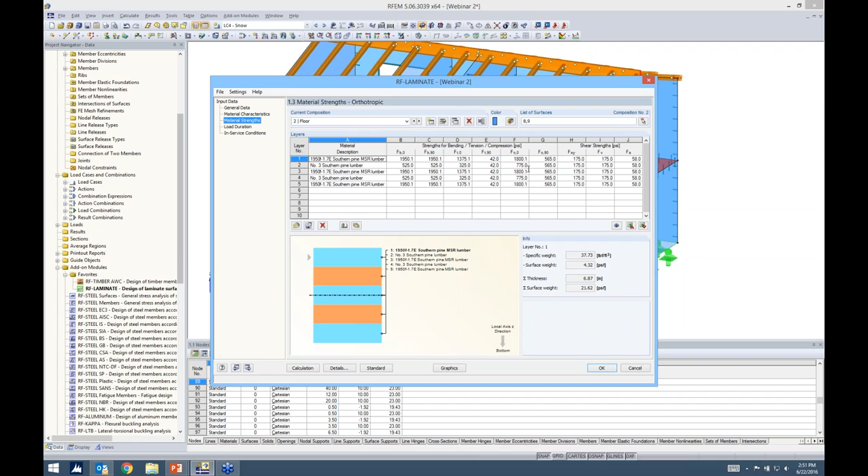And I just continue working down my list here. Material strengths, this looks very similar to material characteristics. It's just giving you your strengths for bending, tension, and compression based on what the code is telling us.

Load duration, this is just from our loads that we've already entered into RFEM. So you can see that everything's automatically linked here. Everything looks correct except for maybe wind - we want it more as 10 minutes for our load duration. Then the load combinations for ASD are automatically updated with the correct load factor.

In service conditions, is your panel dry or wet? All of ours will be dry. And then you can click on the standard button here, and we get some other factors that are applicable to our strengths, our capacities.

What's nice too is that we have all the references to the code here, so you never have to guess, okay, well I don't remember where load duration comes from in the code. We give the reference right here, so you can flip open to the code and take a look at that.

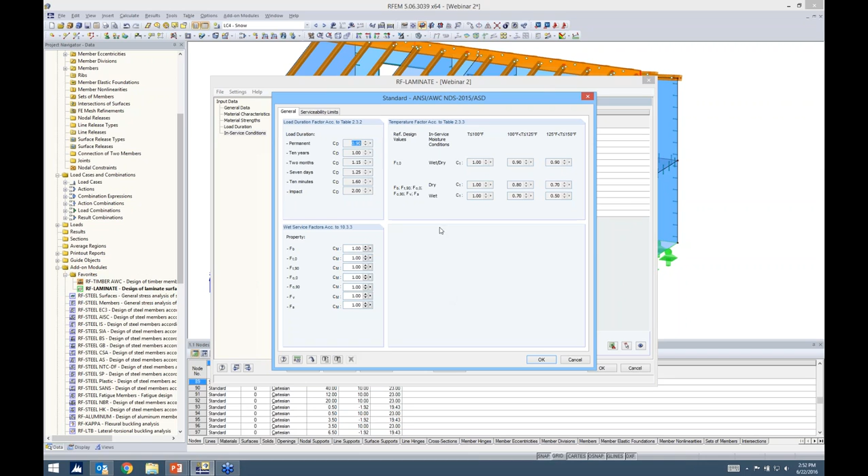So with that said, I would go ahead and run the calculation button now, but it takes just a minute, so instead I'm just going to jump to a model that's already been solved. Let me pop open my RF-LAMINATE module. Like I said, this is the exact same model, I just have all my solution done right here.

So you can see here that now my results have popped up. My max stresses are given as a ratio by loading, so we can see load combination 14, load combination 15, and so forth. You'll also notice there is a stress check for every single bending, tension, compression check. Every check in the code that requires shear will all be listed here. So that's one awesome thing about RFEM - we don't just give you the controlling ratio, we give you every single one of them, so that way you can really understand what all the different load checks are.

As we scroll through these, you'll notice that our diagram is changing for all of them. But let's say, okay, maybe I'm really only interested in the max load check. Well, I can filter it according to the max here, and it jumps to the load combinations that are controlling. You'll also notice that if we go back to the full list, regardless, we get our max ratio listed right here. We have a nice green smiley face, so we're below 1.0.

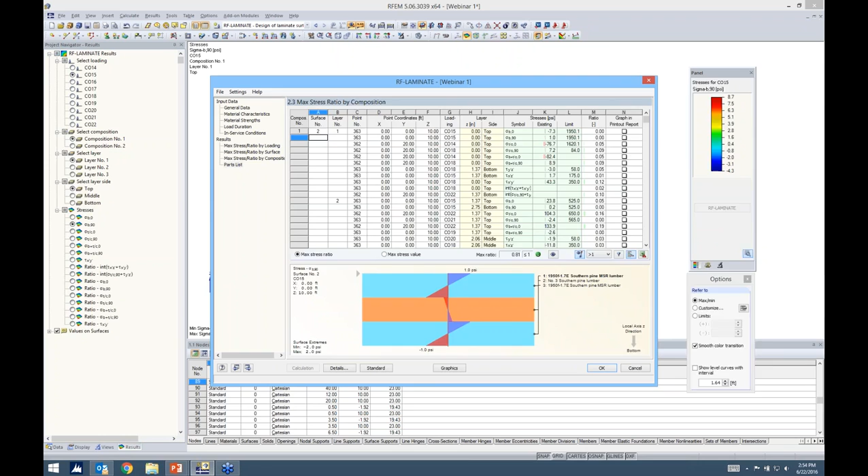These other options are basically just rearranging your results. This one is according to surface, so now surface number 2 is listed here. And then we have composition, so our walls and our floor that we created. We also have our material takeoff here - engineers might be interested in this.

For their calculations and such, you can go ahead and put this report in there. So that is available in this module.

Now the other thing we can do is jump to our graphics, and you'll notice our results bar is here now, and we can actually view all of the different stresses. Although we had it in table form, maybe we want to see it graphically, so we have all of our stresses here that we can view.

We have composition 1, which is our walls. We can jump to composition 2, which is our floors. So very powerful in terms of the graphics as well.

And then we can even view our ratios as contour lines as well. You'll notice everything's blue because we're well below 1.0. If things were closer to failing, it would be closer to that red color.

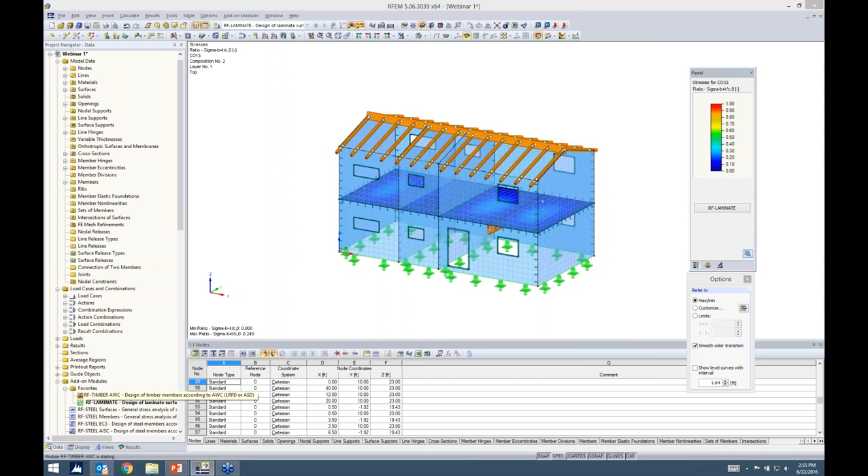Okay, with that said, I am going to jump into the Timber AWC module. And lucky for us, the module looks almost identical to the CLT module. This is pretty much the case for all of our add-on modules.

So when you're opening up whether it's dynamics, steel, or timber, all of them look very similar. So there's no need to learn all the different modules. It's going to be intuitive no matter which one you're in.

You can see here that we can choose design according to ASD or LRFD. I'll go ahead and choose ASD. I have my members just checked as all now. We can also do member sets so that we create a design where all the members are maybe optimized to the same size. So quite a few options there.

This is similar to what's in our steel module and our concrete module. Now for the actual design load combinations, because I'm running ASD, I want to choose my ASD load combinations for my design. Serviceability, same thing as CLT.

If we wanted to take a look at maybe some deflections, I guess it's not in there. If we want to take a look at some of our deflection limitations, we can go ahead and choose that for serviceability as well.

Fire resistance, we also have the ability to do fire resistance design. Again, you would want to choose the applicable load combinations here, and we would get a few more options for fire resistance.

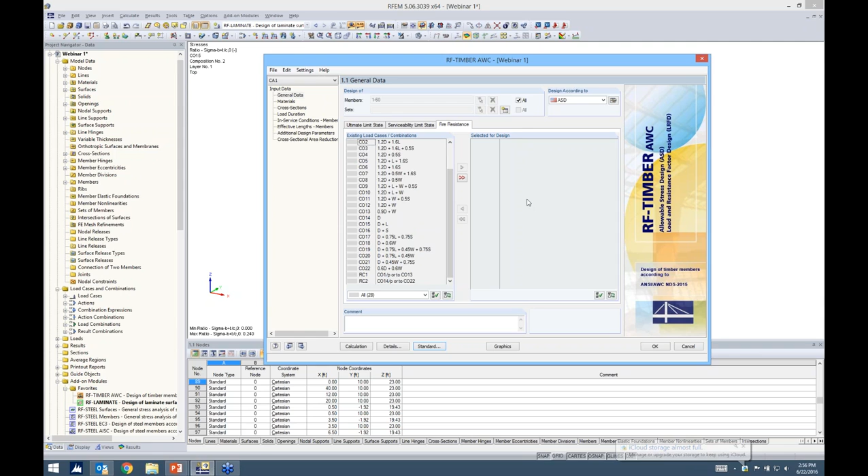Moving down the list to materials, you can see that concrete and steel are bright red. This makes sense. We can't design a concrete or steel beam in a timber add-on module, so that's why these are not applicable. But you can see our timber materials are applicable.

Laminate is not, because we need to use the laminate module. Cross sections, same thing. If we had steel or concrete in here, it would be red as well.

Now you can choose to optimize these members. Let's say we're well below 1 or maybe we're above 1, we can optimize. We get that question quite a bit, and that's certainly an option in these add-on modules.

So you can optimize from the current row, which means it will choose one of the glulam Western species, or we can choose from our USA favorites list that I showed you before.

Load duration, this is the same thing as CLT. You can see here that our load cases were generated, and we already have the load duration factors correct in here. In service conditions, dry and wet, pretty self-explanatory here.

Effective lengths, now this is if you want to consider buckling, if we want to consider lateral torsional buckling, we need to come up with our L effective.

So the default is the full member length, but if there are some connections in the program that will actually give you a shorter unbraced length, then we can go ahead and modify that here.

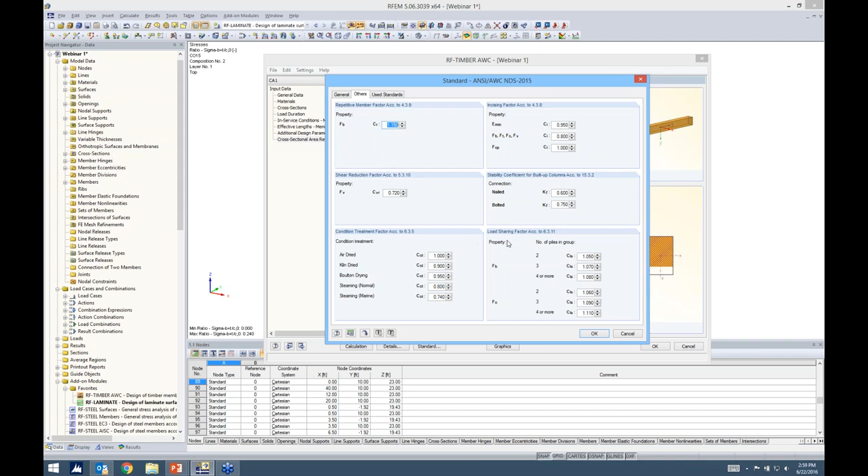This will obviously change your cross-section across the length, so we can go ahead and tell the program where it's located and the proper geometry of these cross sections. If we click standard again, this gives us a lot more factors according to the NDS. We have all of the references here, and I think as far as our timber module, we're very strong in timber, so we offer a lot more factors compared to maybe some other competitors. Stability coefficients for built-up columns, shear reduction factors, load sharing—everything is pretty much available here.

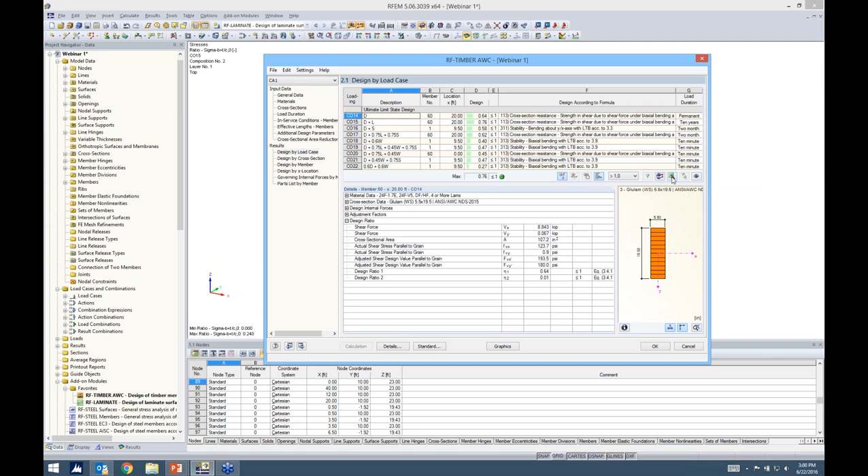All I need to do is go ahead and click the calculation button, and you'll notice I get my green smiley face. Again, just like CLT, I can filter if I want. Also keep in mind that throughout the program we have direct links to Excel, so you don't need to worry about copying and pasting—we can actually use this button to directly integrate with it. We get the design according to the cross section.

Maybe more interesting would be the design by the particular member. Again, the program is so powerful that we give every single check, not just the controlling ratio. And even better, we give every single variable that's used. We list our cross-sectional data that's being used and our internal forces that we're comparing it to, so we get very little tech support asking where these numbers came from or why this code check is controlling over another. Everything is listed here, so it's very thorough. And then, of course, the takeoff ratio and parts list by members located at the end as well.

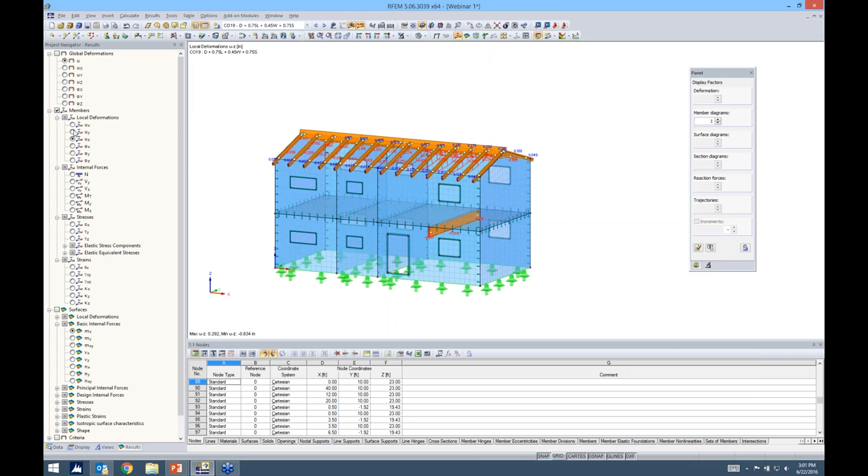We can view everything graphically. You'll notice for the NDS, we don't have much to show here other than the design ratio, but you can always switch back to one of these load cases in RFEM to show your results for these different members here. We can show internal forces, which if I change this to wireframe, you'll be able to see it a bit better. So quite a few options in terms of running a timber analysis.

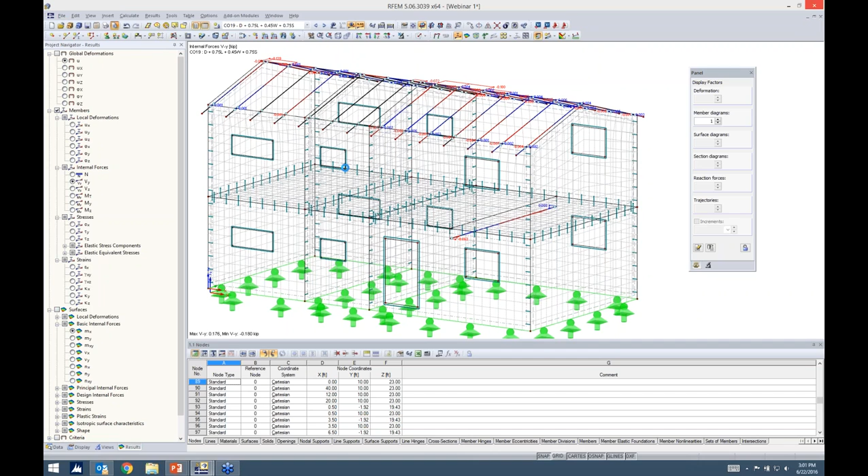Okay, one quick thing before we conclude the webinar—I just want to show you guys the printout report. I think it's something that is quite powerful, especially in comparison to a lot of other printout reports that you have probably dealt with from other software competitors.

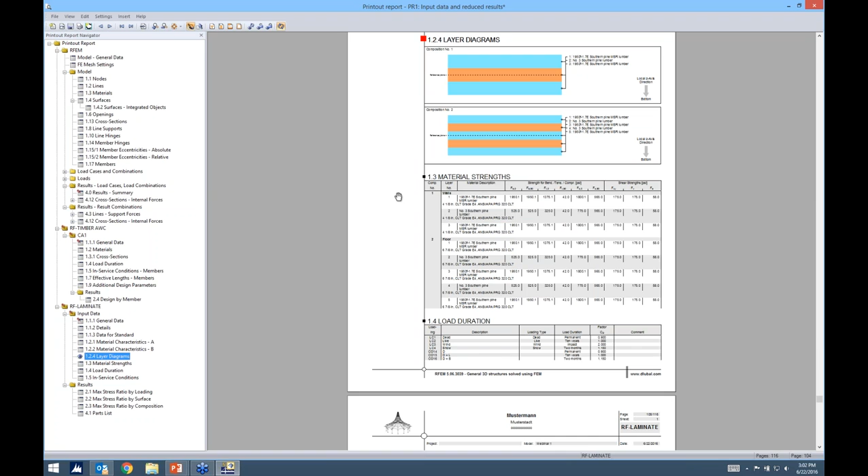You'll notice that a completely separate application pops up, and here's our table of contents right here. Let's say we want cross sections before line supports—we can just drag and drop, and the program will automatically update that. Not only RFEM, but we also have our add-on modules listed down here, RF-LAMINATE. Everything was brought in from those add-on modules as well, including some layer diagrams. You can always add pictures in here, and if something were to change in your model, you don't have to worry about reprinting pictures—everything will be updated automatically. So everything's very synchronized within the program.